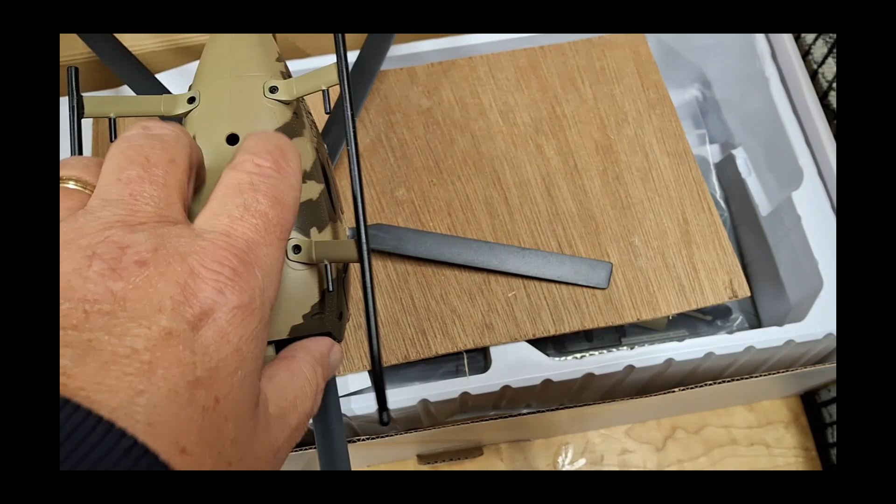So quite a simple task installing the skids. It was just to put these screws in, heavy threaded screws, a bit like a machine screw, into a plastic fitting on the inside of the fuselage. Only thing I can say here is be very careful not to over tighten these as they're going in, because they're going into plastic, so I would imagine it's quite easy to strip the plastic and the hole not be too big then, and it'll not bite. So just be very careful as you nip those up.

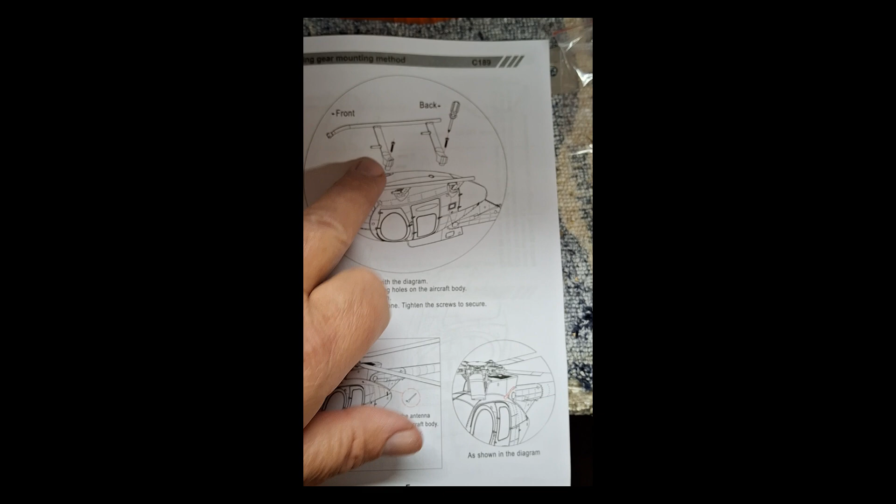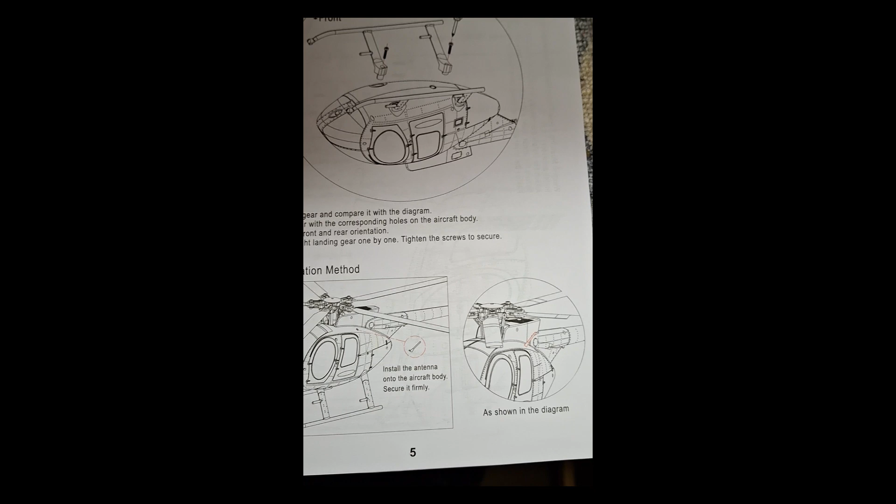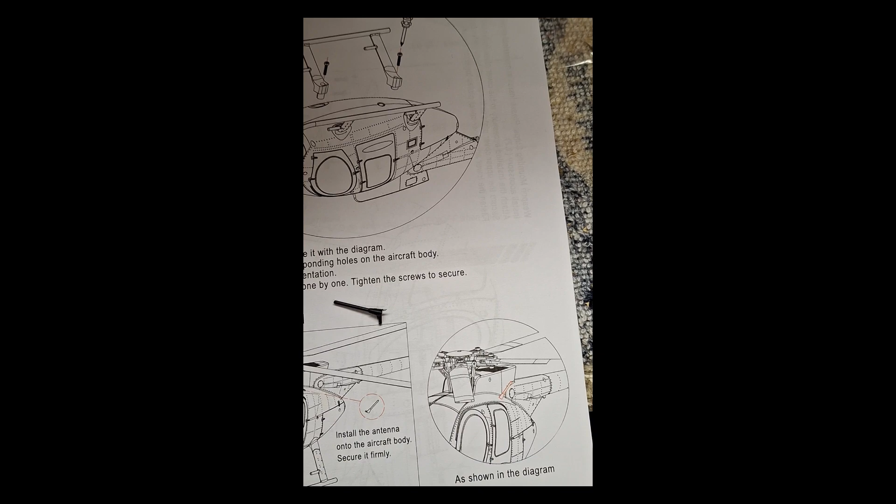Okay, the skid step is shown very clearly in the manual. I just thought I'd reference this, which is the aerial, and this is a separate component, so not easy to find, but it's in the packaging. So have a good look through the packaging, make sure that you find this.

Okay, as you can see now, the aerial's been installed. There's a thickish pin at the base of this, and it wants to be horizontally pushed into the fuselage, not vertically down. So nice little scale feature.

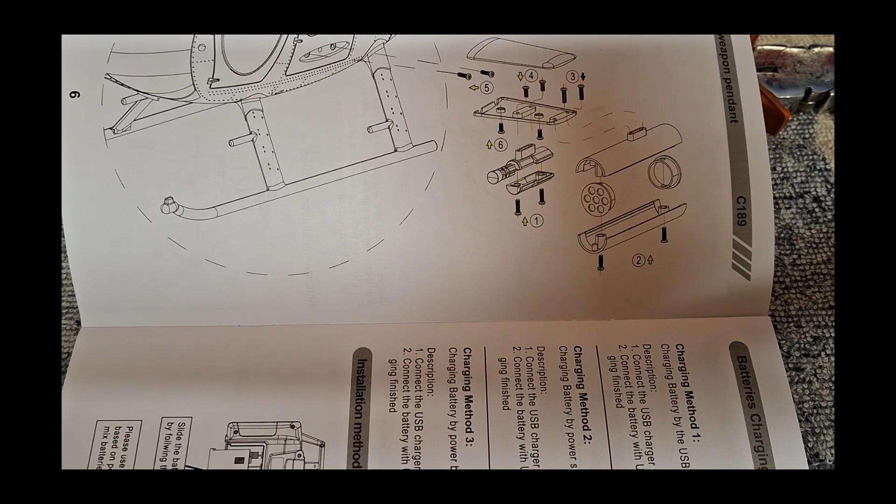Okay, the next step's to build all the weapons up that I then screwed onto the side of the fuselage. So I've just laid out now the components, so I'll get them identified and get them put together and screwed on.

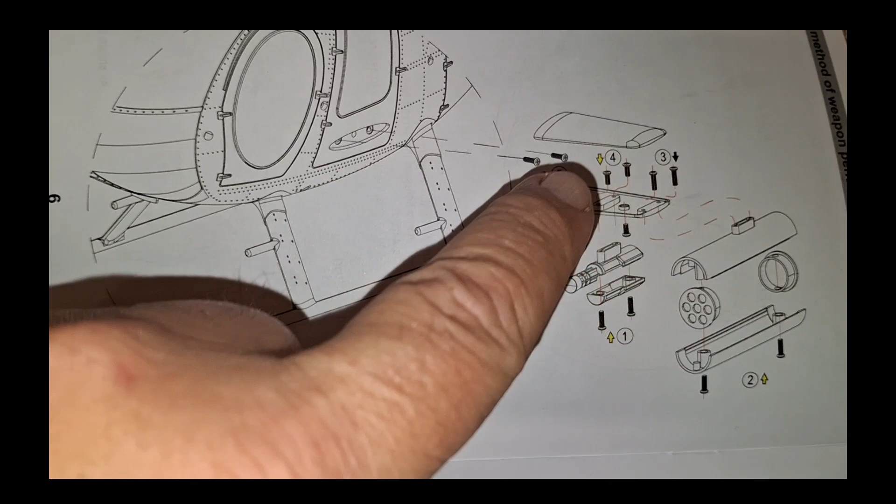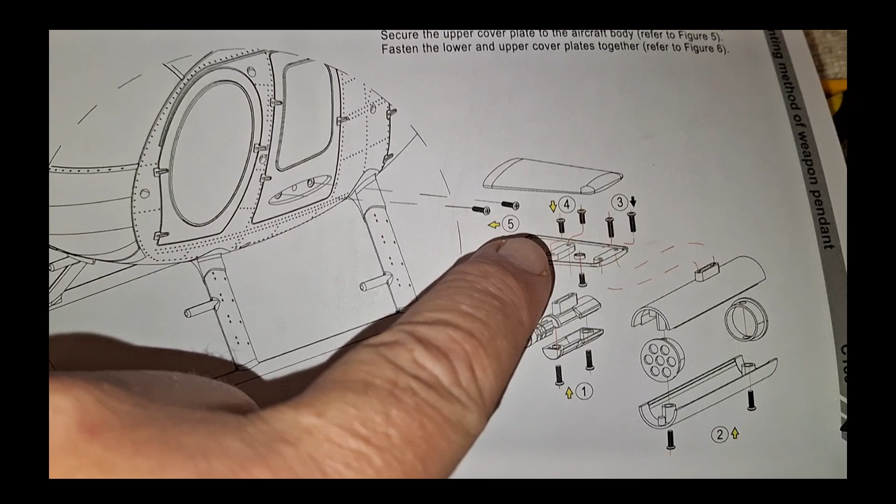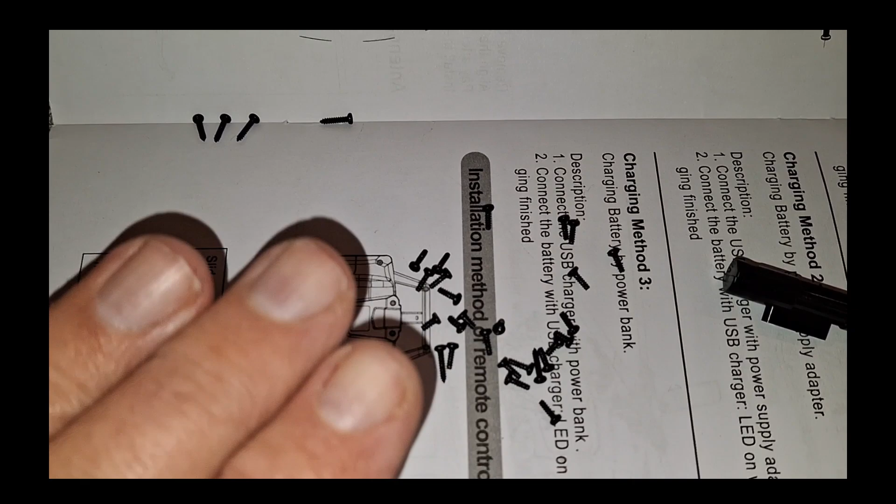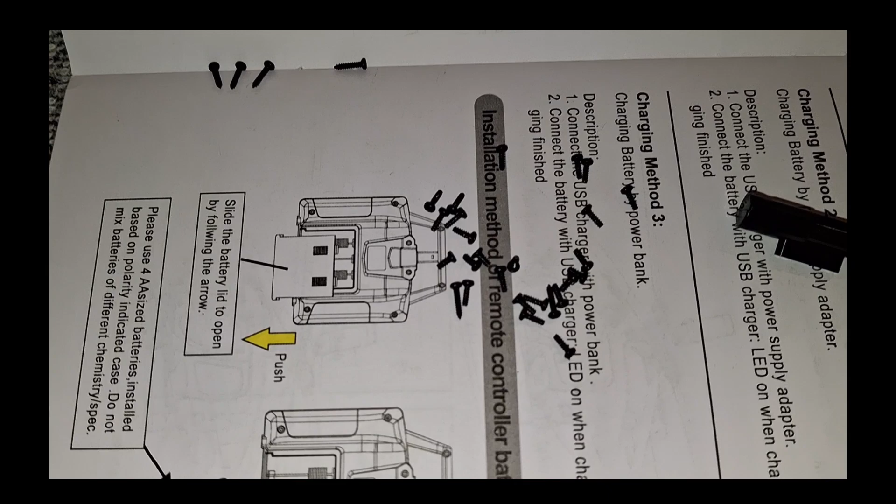Okay, the manual doesn't reference the screw sizes, so I've just looked through trying to see which one is which, because these two here look smaller than these two here, so a little bit uncertain. So all I've done at the moment is kept these separate - these are 4 long ones and the remainder do look the same. So please make sure you do that as you're building.

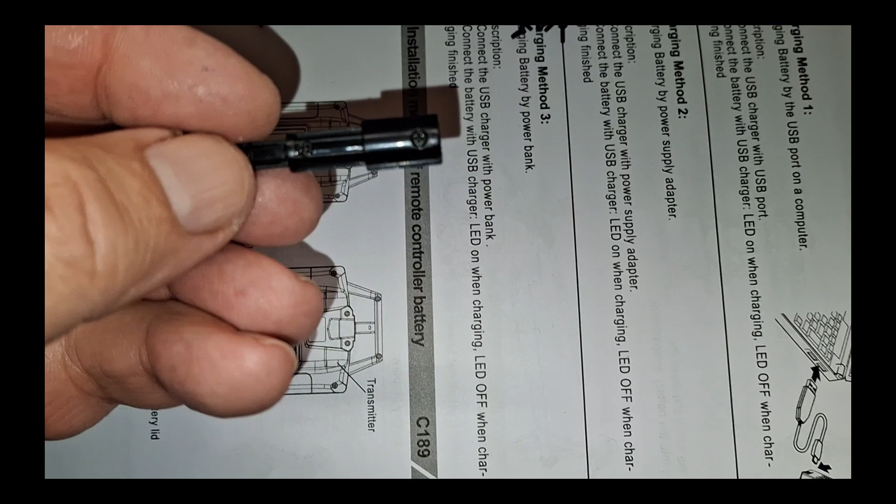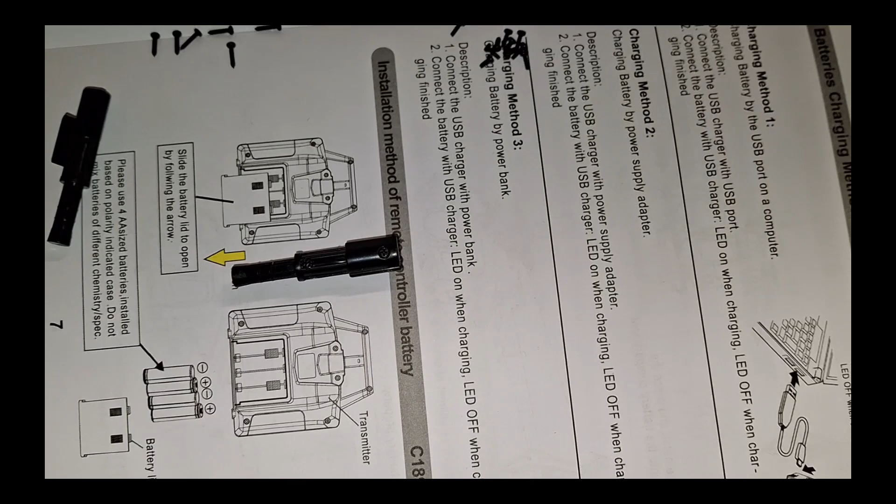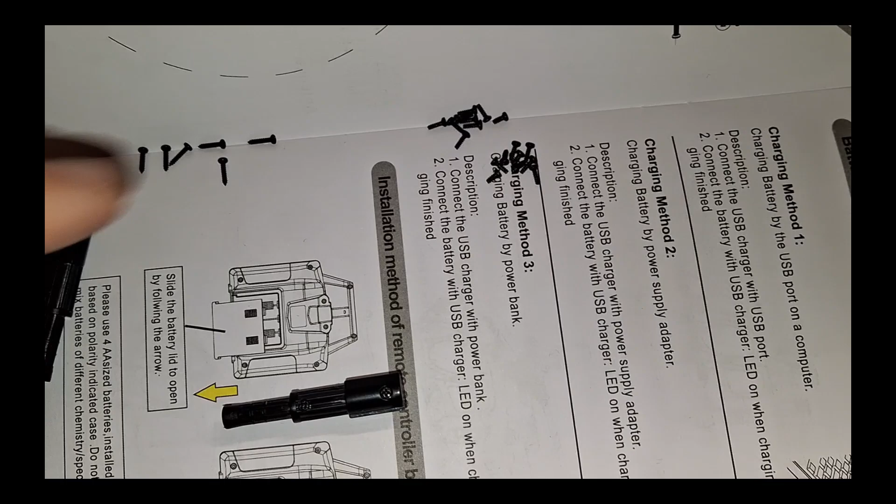Okay, I've constructed the gun now. It's a relatively easy task, just to put the 2 halves together, and there's 2 screws, here and here. One thing I'd like to point out at this stage though is it's extremely important to use a screwdriver that has a magnetic head. It is a very, very fiddly task - very easy to lose these little screws. One other point as well is I'm working in my workshop, which I've got quite a lot of projects on at the moment, so it's a bit of a mess.

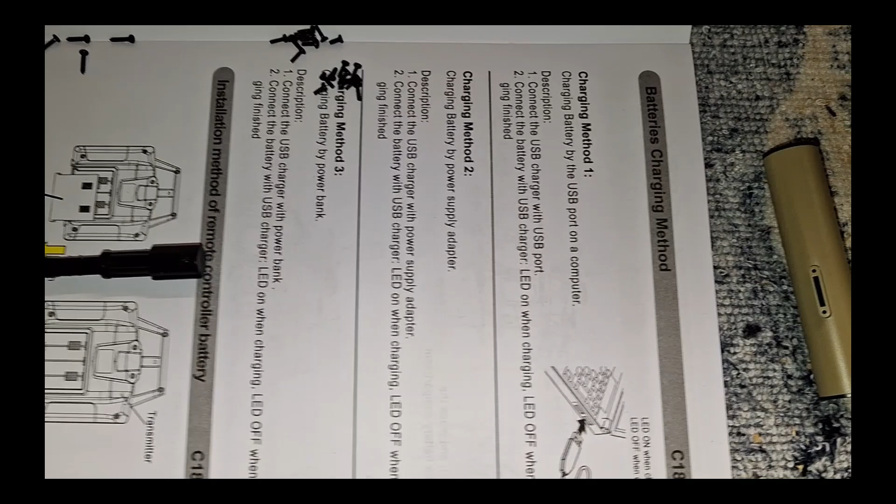It would be better to do this on a table or something like this, where if you drop one of the screws, you're not going to lose it, whereas I think if my screws went down there, they would be lost forever.

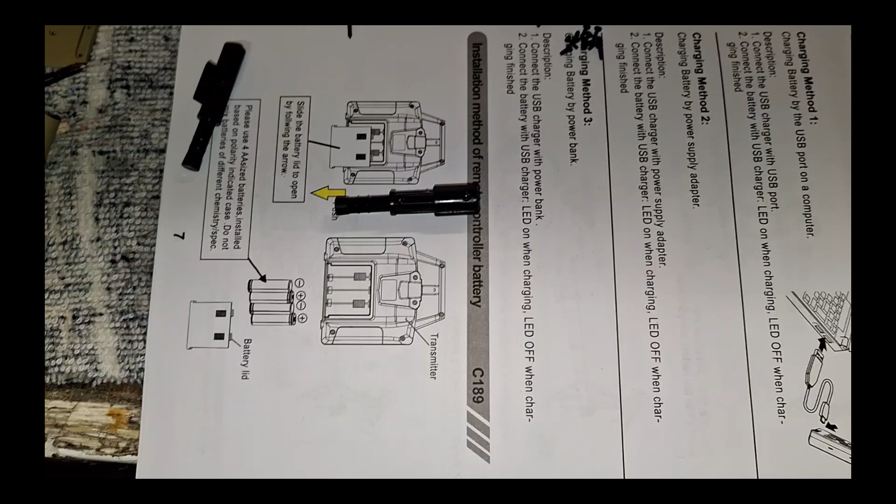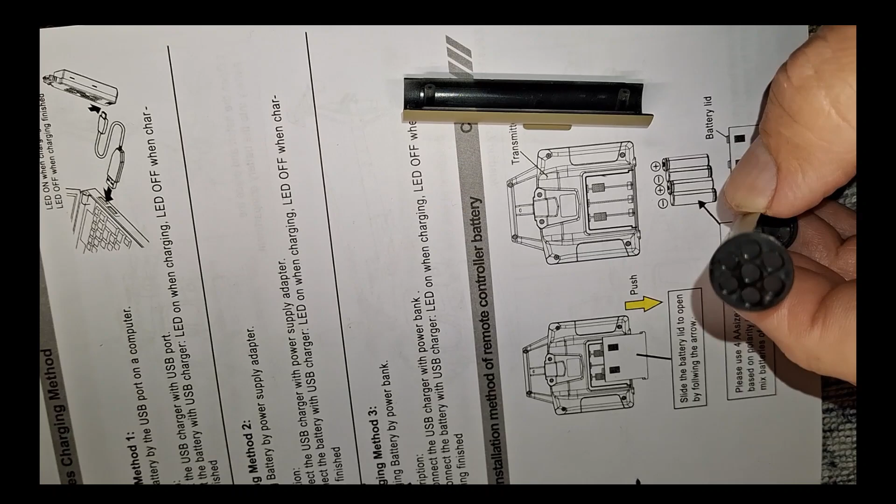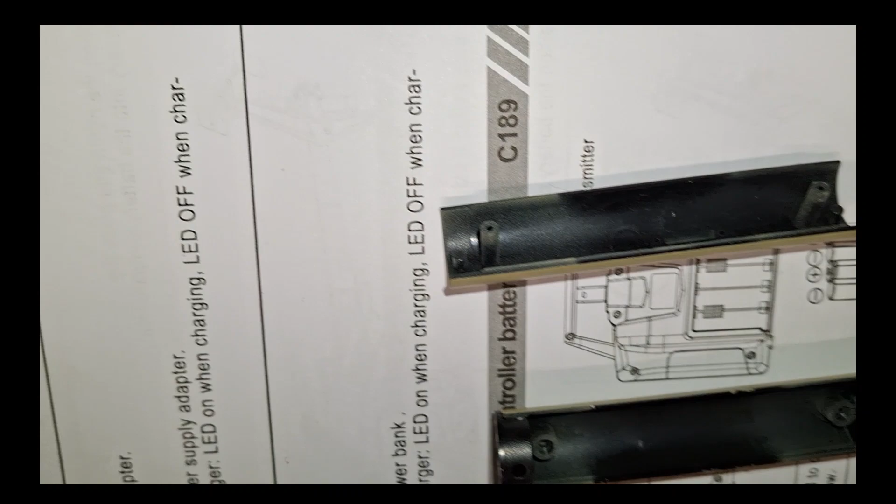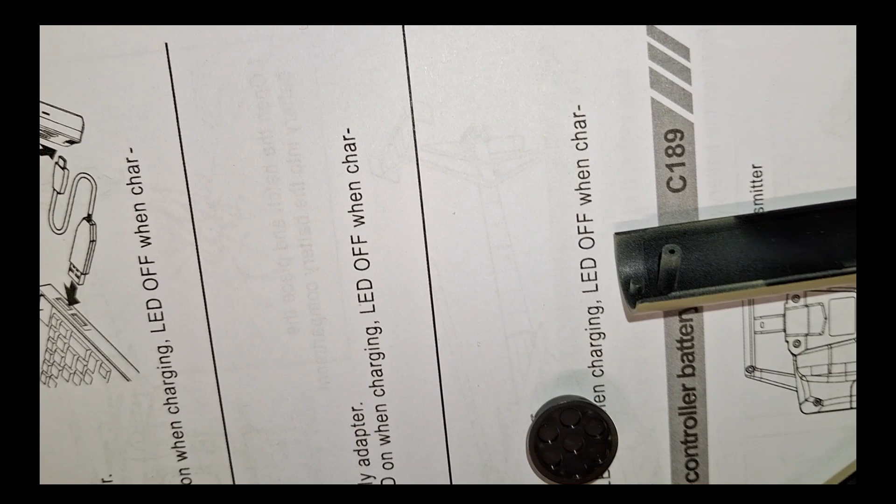Okay, the next one's the rocket launchers. Just a noteworthy comment on these: the rocket ends sit in, and there's a hole on the top there, so they sit into the launch pod. There's a peg here that fits into the hole on the top of the end. Quite easy to install, and then it's put together with 2 screws in there, and that's the rocket launchers done.

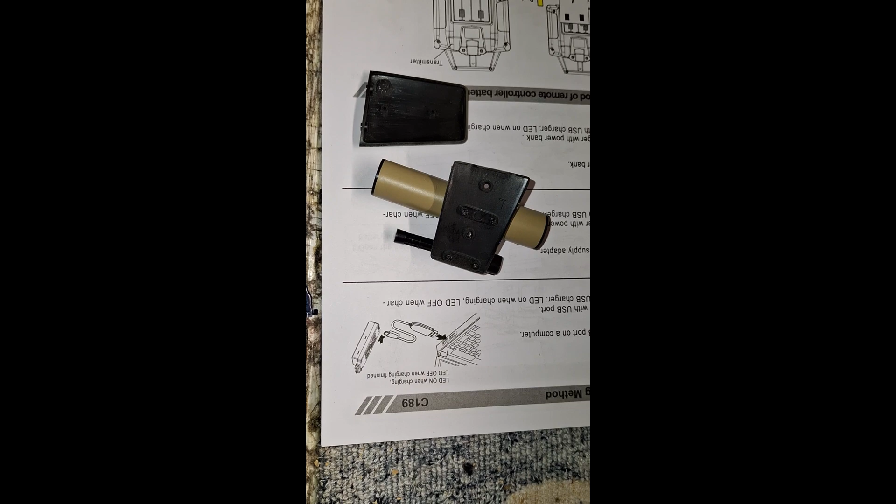By dry fit I mean just at this very early stage, push the two together. These aren't screwed together. This is actually the right side, so if you install onto the heli like that, it's like on the right side - this is the left side, but they are handed, and it's important because if you don't get it right, say with this being the left-handed one, if I'd put the right on the left side of the heli, the rocket launcher and guns wouldn't have looked right on the heli. I've just found this out to my frustration.

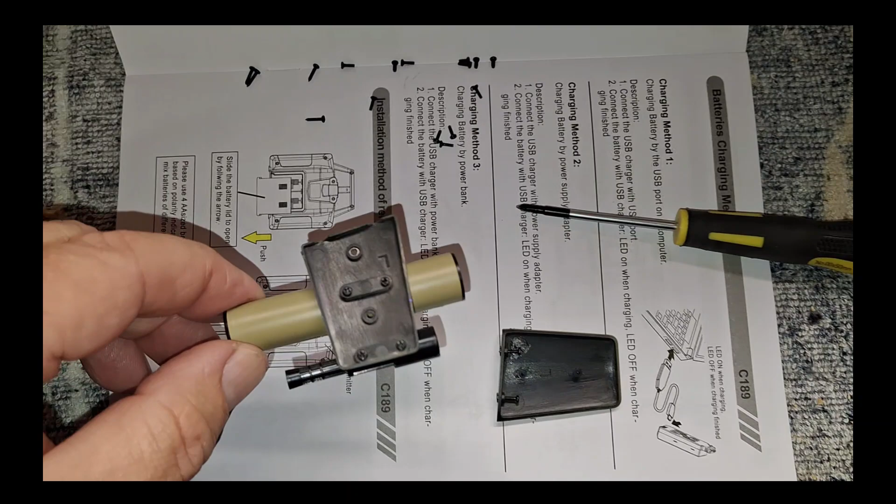Okay, once you've got the lower assembly complete, which is now - as I say, I'm working on the left side - this is now complete, rockets and guns attached. This is the upper plate, which has to be screwed into the helicopter here, which I've tried to do by putting the plate into the hole and trying to screw downwards. But that was very difficult, so what I've done now is I pre-screwed the screws into the plate, so now I can lift this up safely without losing the screws. They haven't come through the far end of this, so they're still in the plastic.

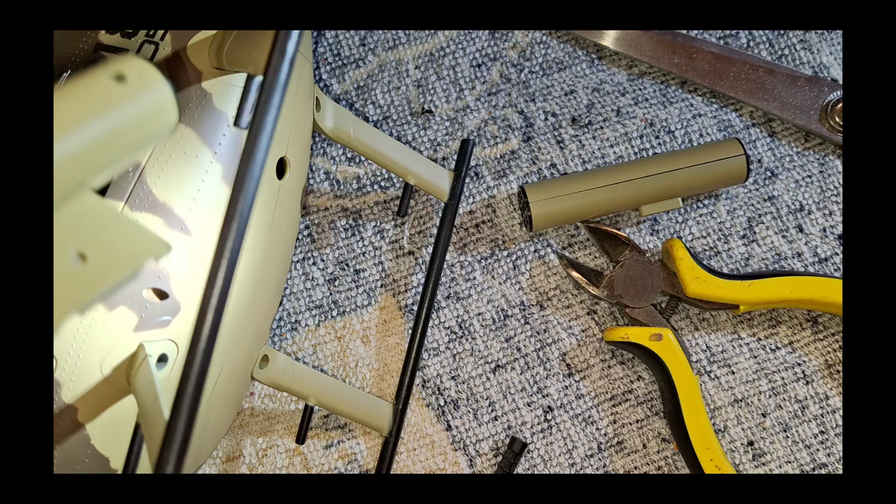Hopefully this will make it easier now to install. Very fiddly, but I'm finding this the better way. Okay, so I've now mounted the top fin on. As you can see, they're screwed in there. The previous procedure I described is the easiest way for sure. So now it's just a matter of screwing this to this - that's the next stage.

Okay, so as you can see now, that's the right hand side completed. Looking very nice, I have to say. Would have been nice to have got the rivet lines and everything here - just a small niggle of mine. But other than this, perfect, really good looking heli and scale detail.

Okay, there she is, complete. Both the rocket launchers are on and guns. I've just tightened the skids up a little bit - I realised they weren't quite tight. I've also adjusted a couple of these where the blades are, in my opinion, were a little bit too loose, so I've actually slackened one off that was a bit too tight. But just so you know, if this is your first helicopter you're buying, these should move freely, the blades within.

So you should be able to bring them together like this. This should be the same sort of friction that you would feel on a tap - quite free. The idea is that if you pick the heli up, they should stay where they are, or if not, move a little. So I think now, having done that test, they may just want loosening off a little bit. But yeah, she looks lovely. Flying's the next stage.

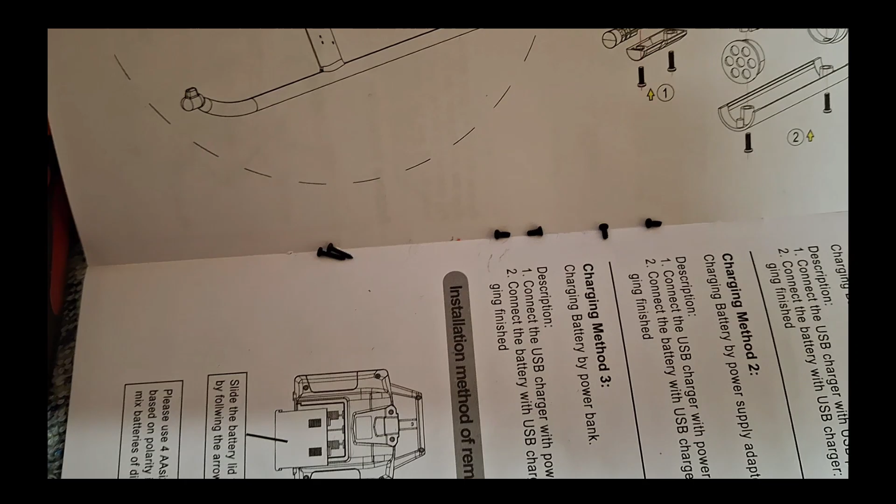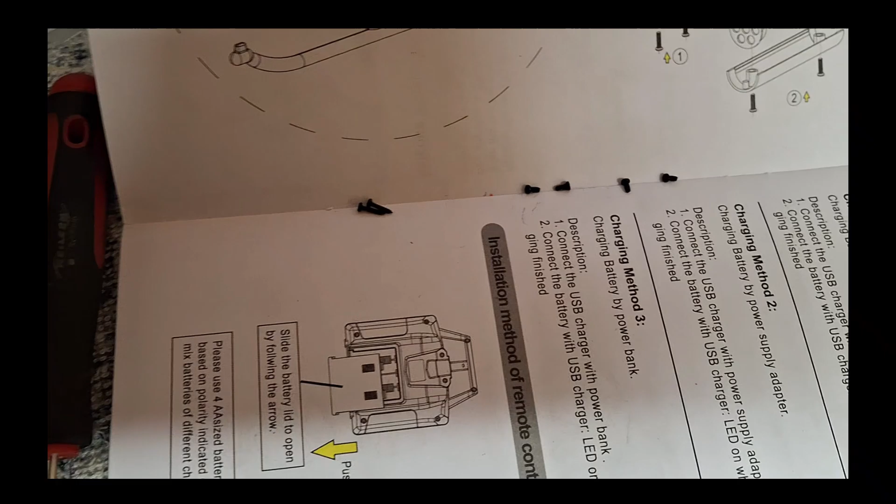Quite a few screws left, which is a little bit worrying because it must either be excess or go somewhere, but anyway, I followed the manual and that's what's left at the end of the build. I'll keep these for any issues I may have in the future. It's taken me about an hour to put it together. Anybody with any sort of Airfix plastic modelling experience will have no problem at all with something like that. So yeah, very good - let's get her out and fly.